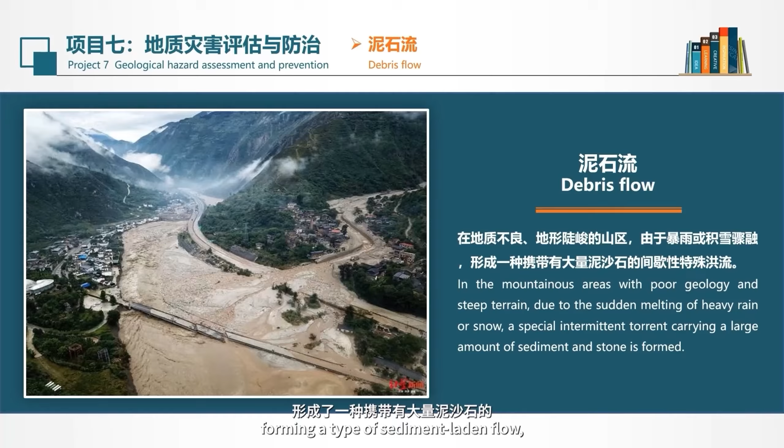First, let's look at the definition of debris flow. A debris flow refers to an event occurring in areas with poor geology and steep mountainous terrain, where heavy rain or sudden snowmelt forms a type of sediment-laden, intermittent special flood flow. Debris flows erupt relatively suddenly, and their harm is relatively great.

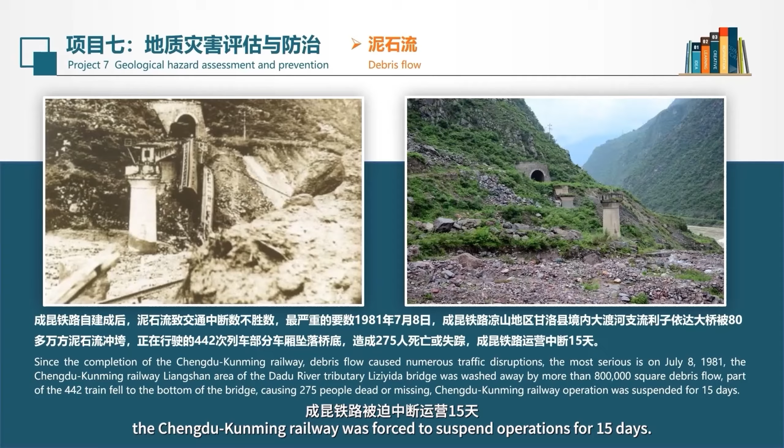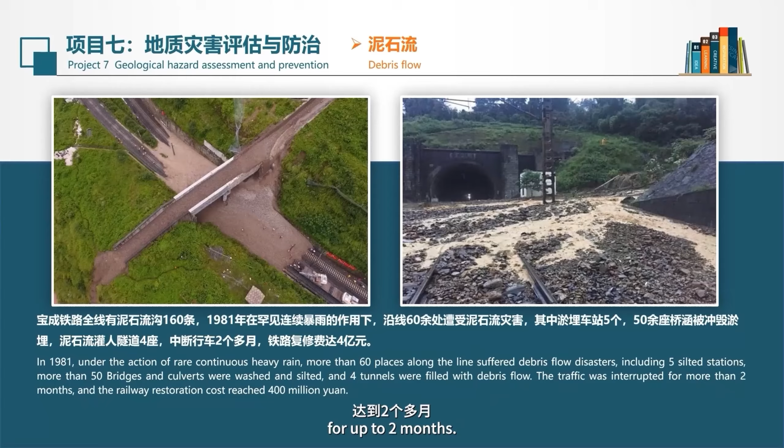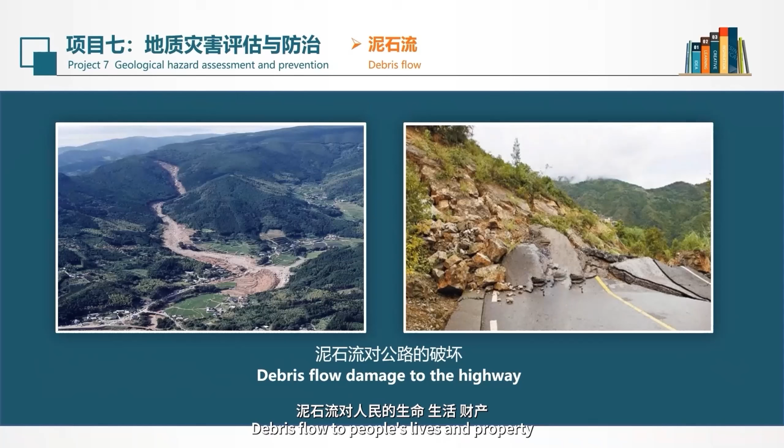The mudslide also caused harm to the Baocheng Railway, with train services discontinued in 1981 for up to 2 months, and repair costs reaching 400 million yuan. Debris flows also caused serious damage to highway construction. Debris flows cause huge damage to people's lives and property, as seen in the damage caused by the mudslide in Zhouqu County, Gansu, and the debris flow damage to Beichuan County City.

Debris flows are characterized by their fierceness and suddenness. Once a debris flow occurs, it causes great harm to our project construction and to the safety of people's lives and property. Today we will start with the classification of debris flows, zoning, and formation conditions to learn about debris flows, and then learn how to prevent them.

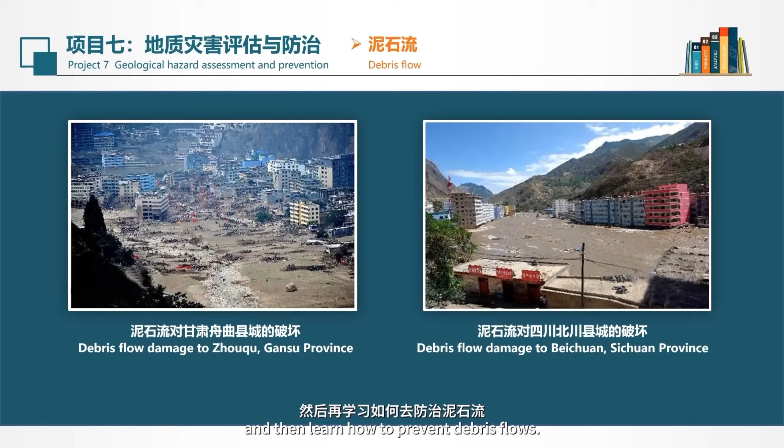Classification of debris flow: first, classified according to the composition of solid substances, it can be divided into mud flows, water-rock flows, and debris flows. A mud flow mainly refers to when the content of silt and clay is between 80% and 90%. A water-rock flow mainly has silt and clay content less than 10%. When silt and clay content is between 10% and 80%, we call it a debris flow.

The second major classification is based on fluid properties. It can be divided into dilute debris flow and viscous debris flow. Dilute debris flow is mainly composed of dilute slurry and sand gravel. Viscous debris flow is mainly composed of viscous slurry and sand and gravel.

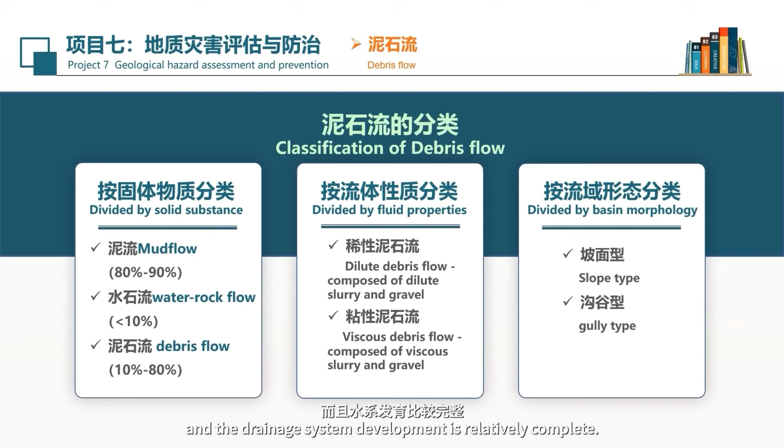It can also be classified according to the morphology of the watershed, divided into slope-type debris flow and gully-type debris flow. Slope-type debris flow refers to when the watershed is less than 0.5 square kilometers; it mainly forms on hillsides where the basin is underdeveloped. Gully-type debris flow generally has a drainage area greater than 0.5 square kilometers, with clear gullies and relatively complete drainage system development.

Zoning of debris flow: a typical mud flow involves an entire valley and can be divided into formation zones, flow area, and accumulation area. The formation area is located in the upper reaches of the valley, mostly surrounded by mountains on three sides, with the surrounding mountains being high and steep.

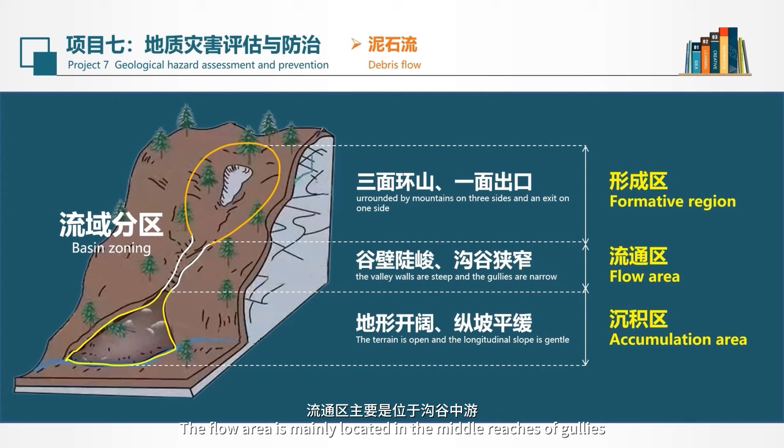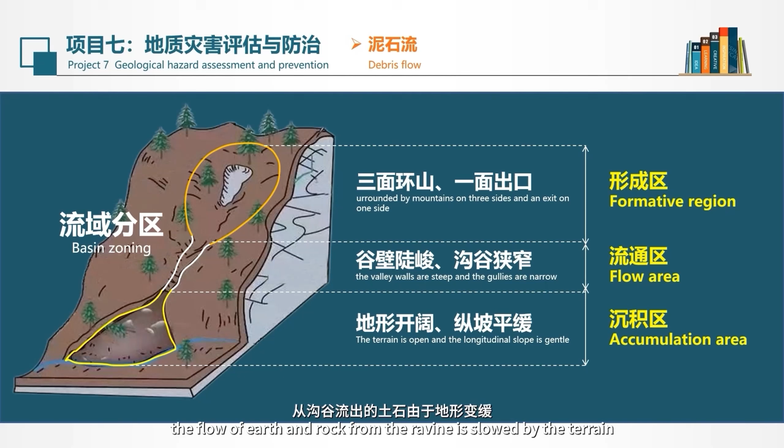Poor growth of vegetation, having a funnel-shaped or dendritic appearance with many branches, is conducive to the collection of water and loose earth and rock. The flow area is mainly located in the middle reaches of gullies, mostly steep canyon terrain, where debris flows can move quickly downstream. The accumulation area is generally located at the foot of the gully slope, with open and flat terrain, where the flow of earth and rock from the ravine is slowed by the terrain and piles down.

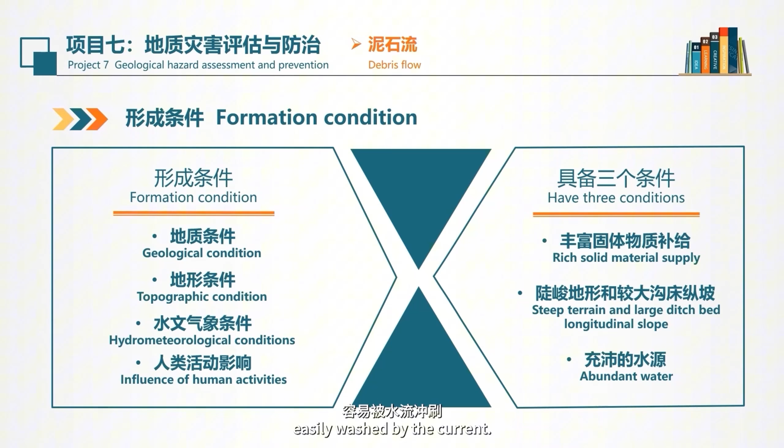Formation conditions of debris flow: there are three conditions - a rich supply of solid matter, steep terrain, and plenty of water. First, an abundant supply of solid matter requires a hillside or valley surface with a large accumulation of loose debris that is easily washed by the current. Second, steep terrain conditions are generally favorable for water pooling in mountainous areas, where the velocity of water is large and the scouring force is relatively strong.

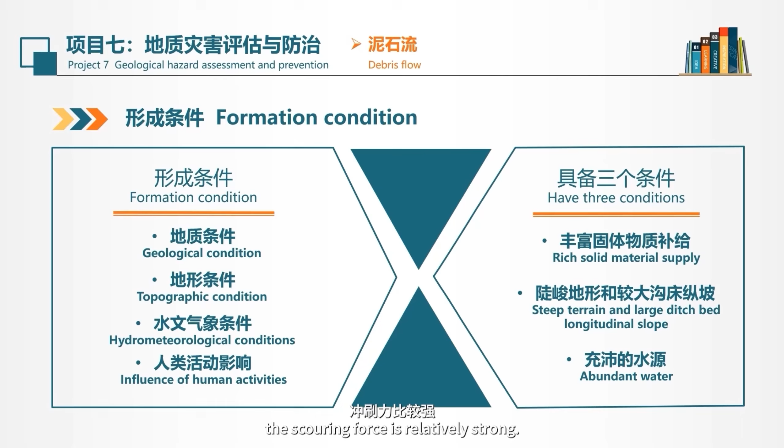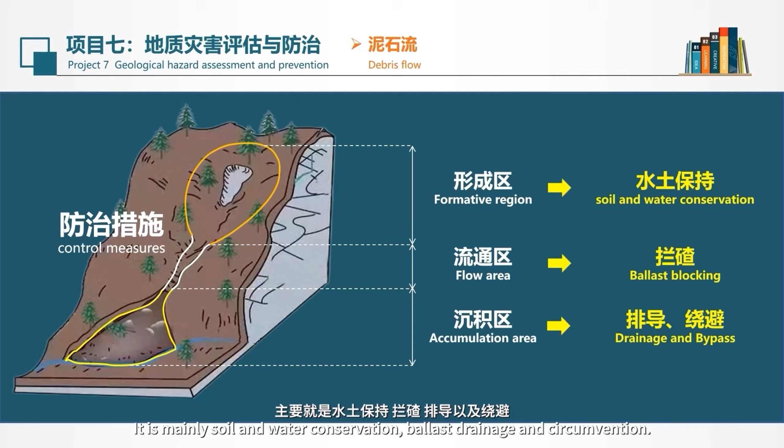Thirdly, abundant water—heavy or persistent rain forms a lot of water. Mudslides are deadly. How can we prevent it? Mainly from the following four aspects of debris flow protection: soil and water conservation, ballast blocking, drainage, and circumvention.

Firstly, in terms of soil and water conservation, it mainly adopts flood drainage, slope protection, and vegetation protection, making full use of retained precipitation to conserve soil and water and regulate runoff, preventing or reducing the size of debris flow, and reducing the degree of damage. The main focus is carrying out protection measures in the area where the debris flow forms, since soil and water conservation is mainly used in the formation area.

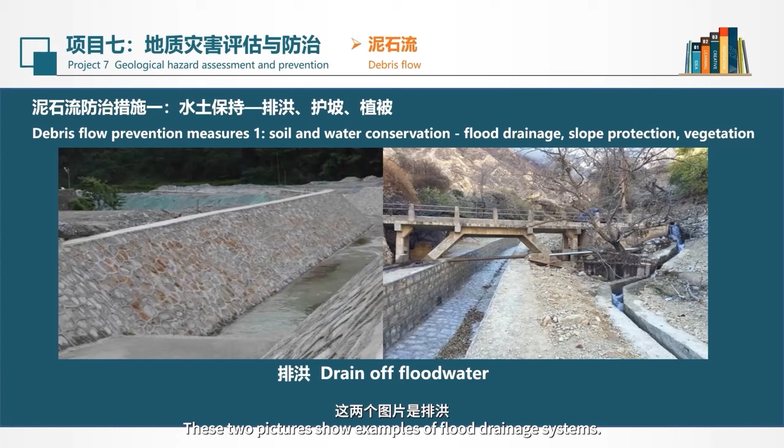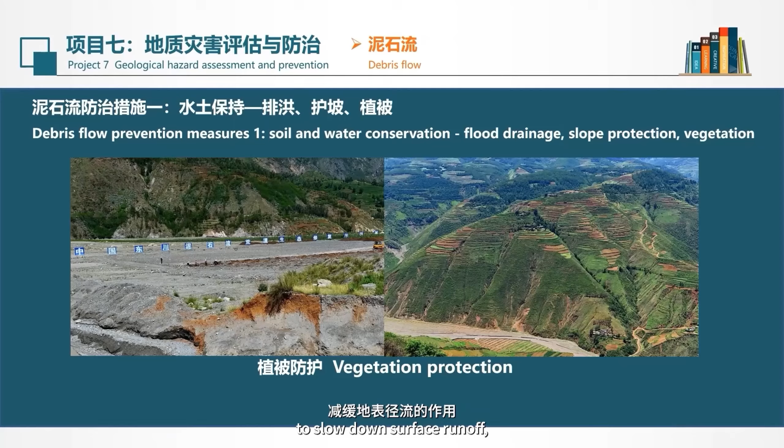These two pictures show examples of flood drainage systems. It can also protect the loose soil on the slope. At the same time, it can be protected by vegetation—by planting grass, spraying grass, and planting trees. It acts as a flood detention and soil consolidation measure on the slope, intercepting stormwater to slow down surface runoff, which can effectively prevent water and soil loss on the slope.

The second measure involves the use of check dams or debris flow barriers. Ballast engineering is the main engineering measure to prevent debris flow damage. They are constructed in areas prone to debris flows, as a lateral blocking structure whose main function is to filter soil and drain water. We often use ballast blocking measures in engineering, mainly including gravity dams and grid dams.

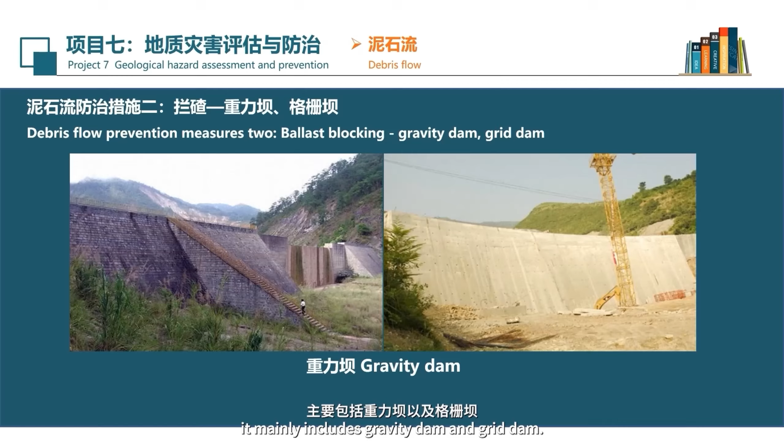This is the grid dam. Compared to a gravity dam, the main advantages of the grid dam are good stone drainage effect, a relatively simple structure, a relatively short construction period, and a relatively low project cost.

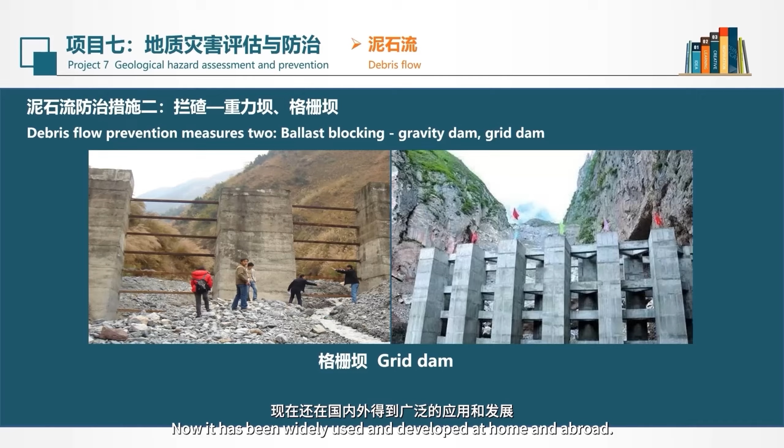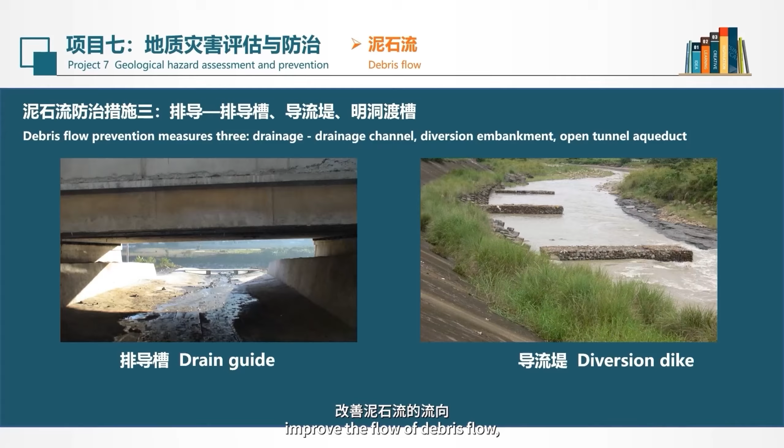Building drainage channels, diversion dikes, open tunnel aqueducts, and other measures. These are the drainage channels and a diversion embankment. The drainage channels are primarily constructed by hand or by retrofitting trough-shaped structures, to divert debris flow to a designated area. The main function of the diversion dike is to improve the flow of debris flow and also regulate the flow rate.

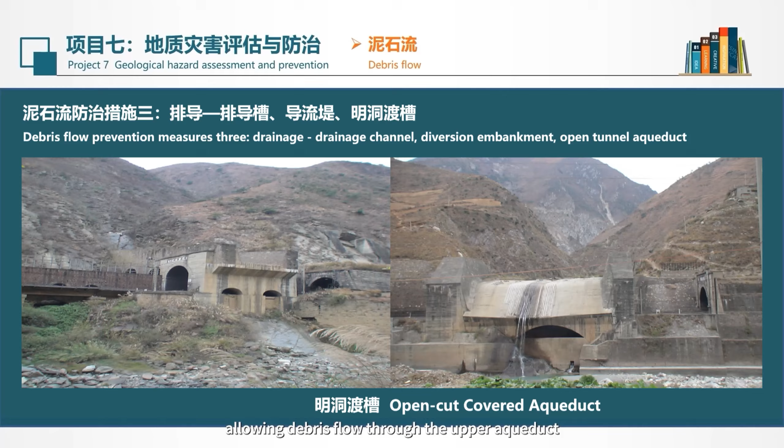Open tunnel aqueducts are mainly built in the area where debris flow flows. They are often set up in areas intersecting with railways and highways, allowing debris flow through the upper aqueduct to protect the safety of road and railway facilities.

Passing round—under what circumstances should evasive measures be adopted for debris flow? For debris flow damage in relatively large sections, we can take evasive measures. The threat of mudslides can be avoided by building tunnels or building bridges across rivers, setting up facilities on the opposite shore.

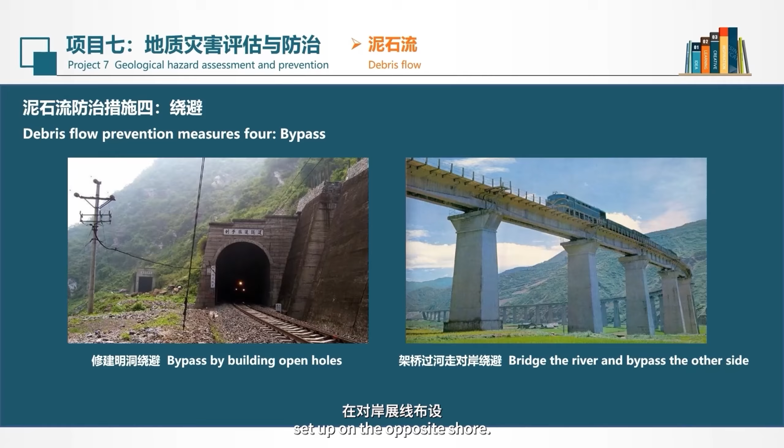Man lives in nature. Massive transportation construction can upset the balance of nature and cause great damage. In the prevention and control of debris flow disaster, we should be in awe of nature too, take the initiative to coordinate with it from a human perspective, adapt to it, and protect it.

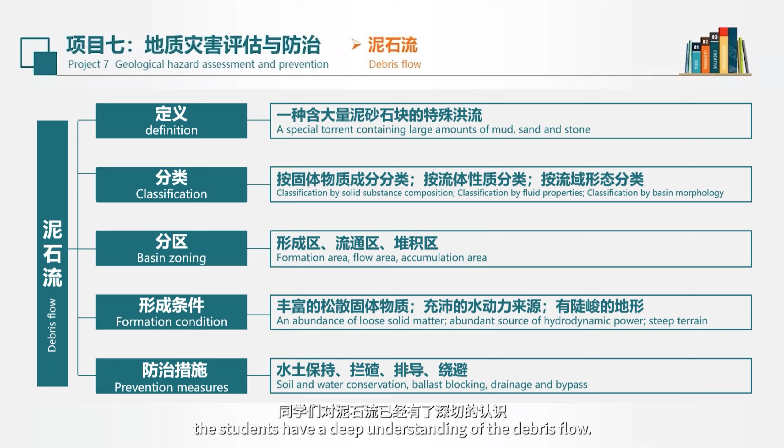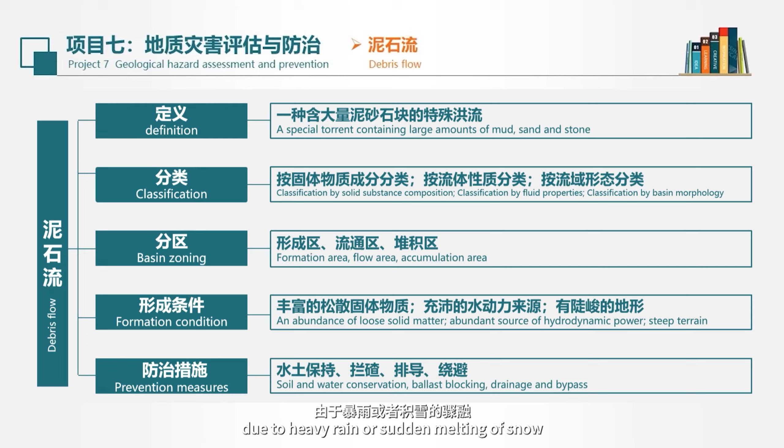I believe through the above introduction, the students have a deep understanding of debris flow. Let's summarize this briefly. Firstly, the definition of debris flow: mudslides refer to a phenomenon in mountainous areas with steep terrain and poor geology, where, due to heavy rain or sudden melting of snow, a special intermittent torrent forms carrying large amounts of silt and rock.

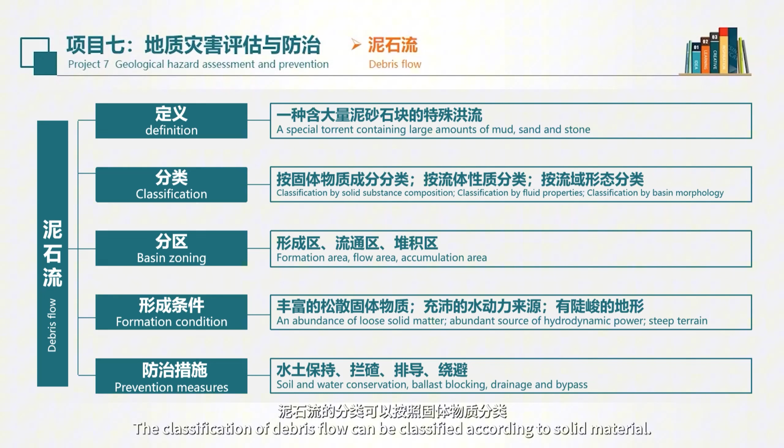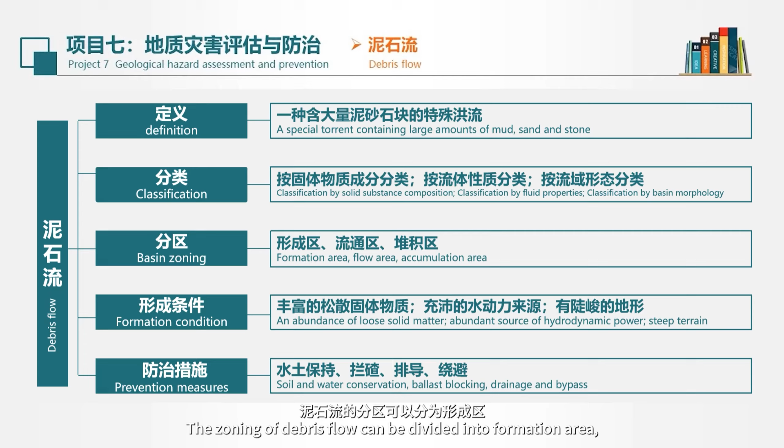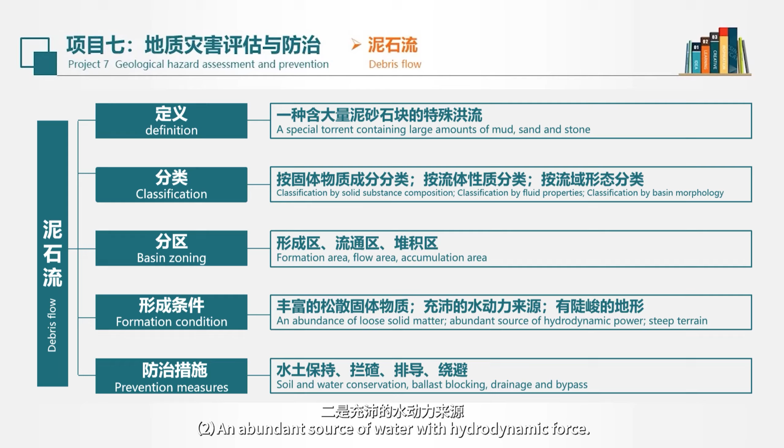The classification of debris flow can be made according to solid material, fluid properties, or the morphology of the watershed. The zoning of debris flow can be divided into formation area, flow area, and accumulation area. The formation conditions of debris flow mainly include three: an abundance of loose solid matter, an abundant source of water with hydrodynamic force, and steep terrain. All three elements are indispensable.

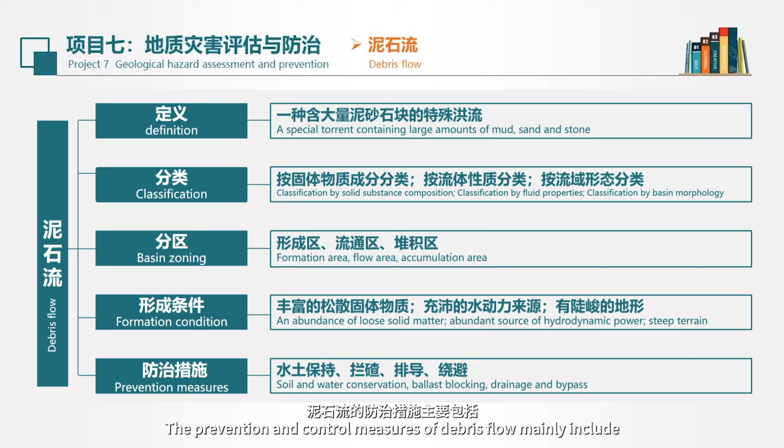The prevention and control measures of debris flow mainly include soil and water conservation, ballast blocking, drainage, and avoidance. In addition to debris flow, earthquakes can cause significant damage to our transportation infrastructure. In traffic construction, how to implement earthquake proofing, vibration isolation, and shock absorption measures—let's study together next time.